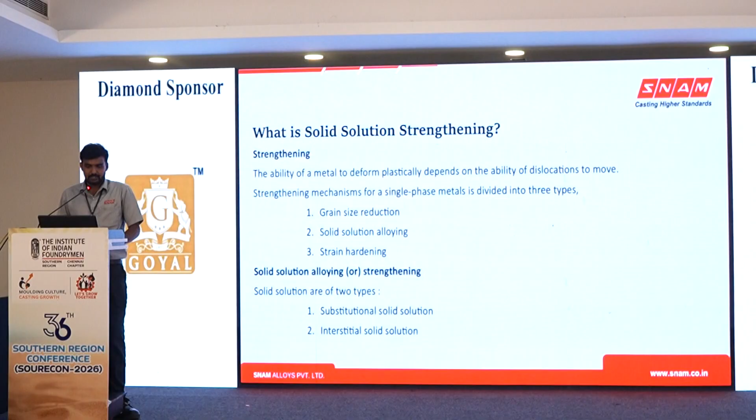So what is solid solution strengthening? Before that, let us understand what defines the strength of a material. Basically, plastic deformation defines the strength of material, and plastic deformation depends on how dislocations move in a crystal lattice. If dislocations move easily in a crystal lattice, the material is softer. If dislocations are blocked or difficult to move, the material is stronger.

So simply, to strengthen the material, we need to block the dislocations in the crystal lattice. For strengthening single phase metals, we have three different types of strengthening mechanisms: grain size reduction, solid solution alloying, and strain hardening. In grain size reduction, by reducing the size of grains, the grain boundaries will block the dislocations and help improve the strength of the material. In solid solution alloying, we add an alloying element to a base metal so that this alloying element creates distortion in the crystal lattice and blocks the dislocations.

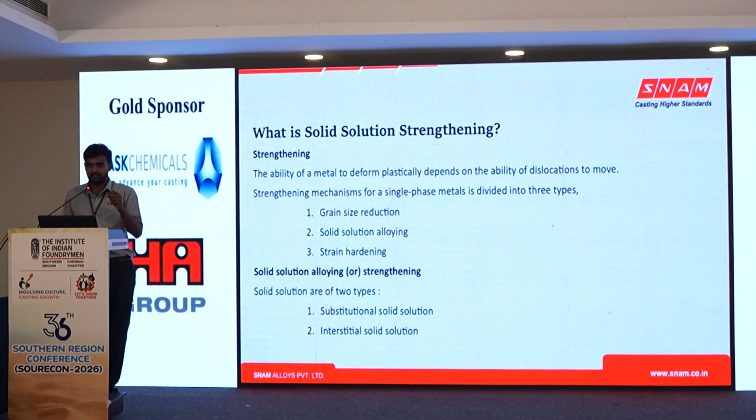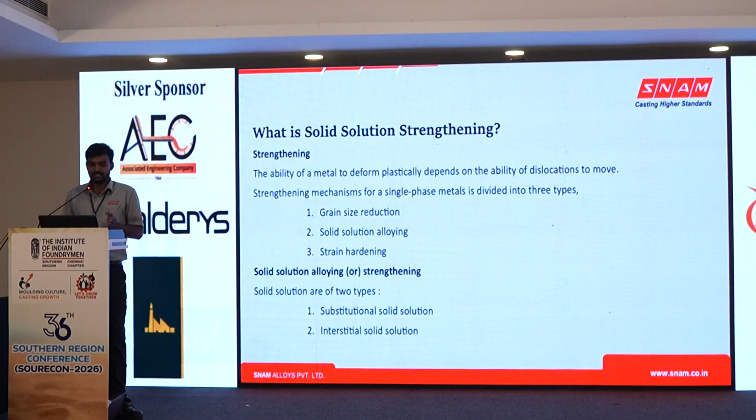This will finally improve the strength of the material. In strain hardening, we physically deform the material so that dislocations interact and block each other, improving the strength of the material. In both cases of grain size reduction and strain hardening, we need an extra step after casting. But in case of solid solution strengthening, while producing the casting itself, we can strengthen the material.

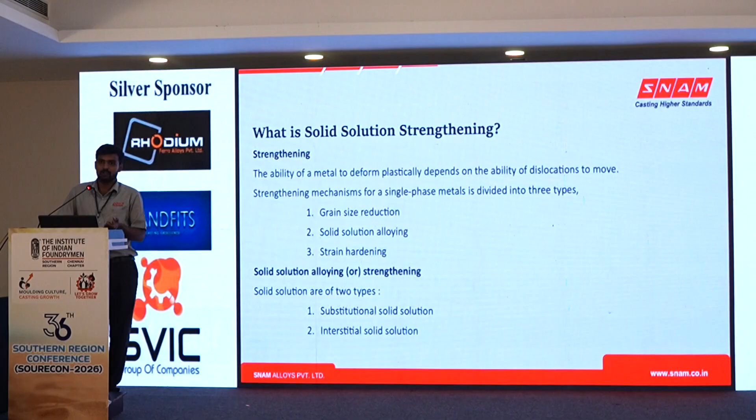So, solid solution alloying: we generally add atoms of the alloying element to a base metal, and this dissolves in the crystal lattice to form a solid solution. Solid solution is classified into two types: one is substitutional solid solution, the other is interstitial solid solution. In substitutional solid solution, the solute atoms replace solvent atoms and create a distortion in the crystal lattice.

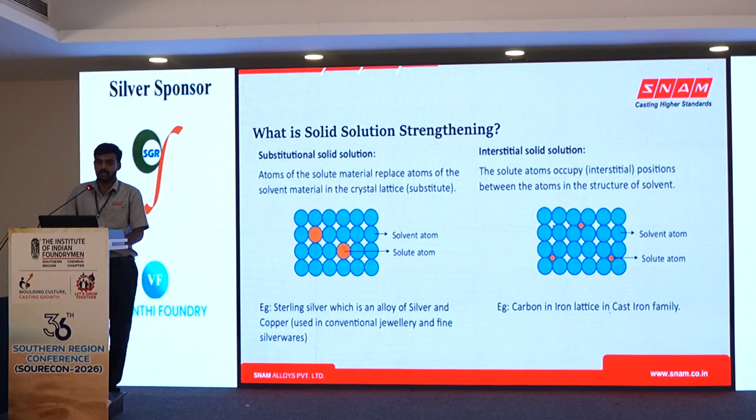For example, sterling silver. Silver is a soft material, but when we alloy it with copper metal, this will increase the strength of the silver, and it can be used in applications like conventional jewelry and silverwares. In the PPT on the left side, we can consider that blue color atoms are silver atoms and orange color atoms are copper atoms.

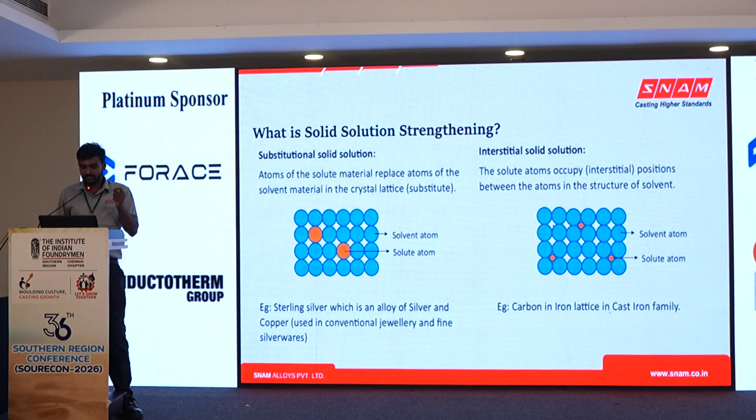So these copper atoms will replace the silver atoms and make the material stronger. But in case of interstitial solid solutions, the solute atoms will occupy the interstitial sites, the gaps between the solvent atoms. For example, carbon occupies the interstitial sites of iron, such as in steel and cast iron, increasing the mechanical properties.

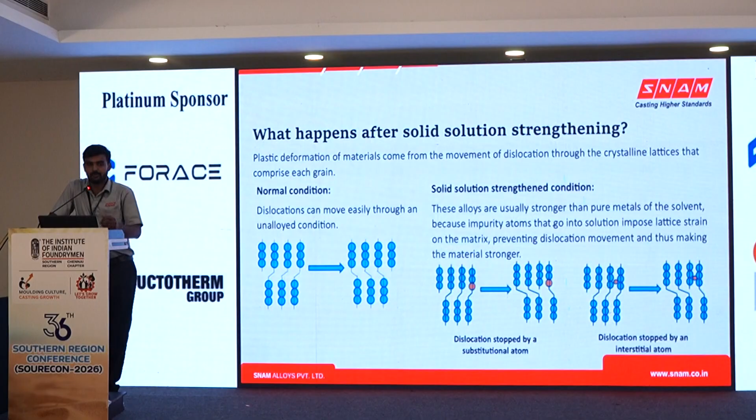So generally, what happens after solid solution strengthening? In a simple way, the material becomes stronger by blocking dislocation movements. For example, you know like a caterpillar, which is the starting stage of a butterfly. It slides one step at a time. If you leave the caterpillar in a smooth place, it will slide and reach its destination fast. But when we place some obstacle like a stone, it becomes difficult for the caterpillar to reach the destination.

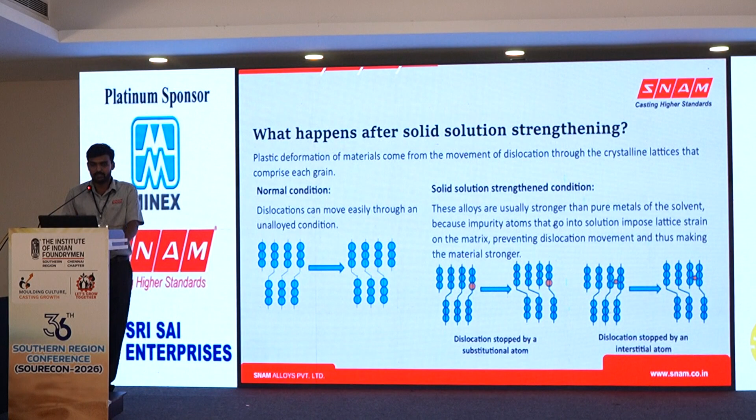So how to produce solid solution strengthened ferritic grade ductile iron? Generally, to strengthen ductile iron, we use strengthening elements like silicon, phosphorus, manganese, copper, etc. But in case of producing a ferritic grade ductile iron, we use silicon in the range of 3.2 to 4.3, depending upon the grade. Why silicon? Because silicon promotes the ferrite phase in the material, helping to increase the mechanical properties by increasing the silicon percentage.

As the silicon percentage increases, the mechanical properties will increase, and also at a constant silicon level, we can achieve a fully ferritic matrix throughout the casting section thickness, independent of casting size or geometry. But other elements like phosphorus and manganese cannot be used because they can have a harmful effect in ferritic grade ductile iron.

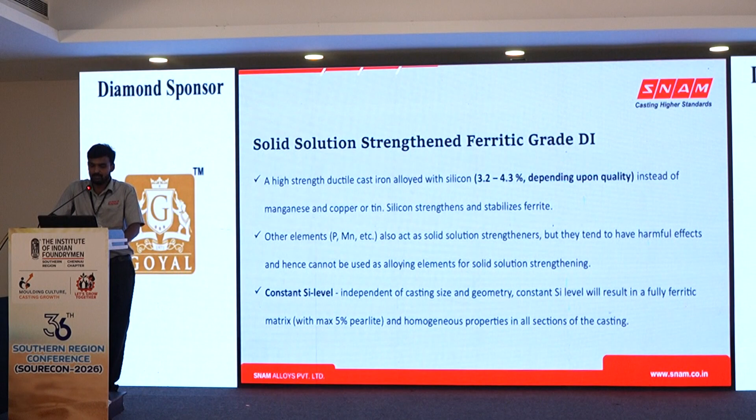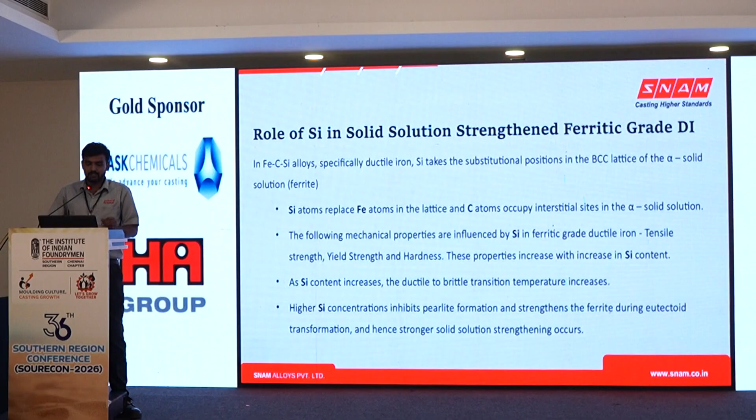So, the role of silicon in solid solution strengthened ferritic ductile iron: in Fe-C-Si alloys, silicon acts as a substitutional solid solution. Silicon atoms replace the iron atoms in the BCC lattice, and carbon atoms occupy the interstitial sites in a ferritic solid solution. As I mentioned, mechanical properties are majorly influenced by silicon — with increasing silicon percentage, the overall mechanical properties will increase.

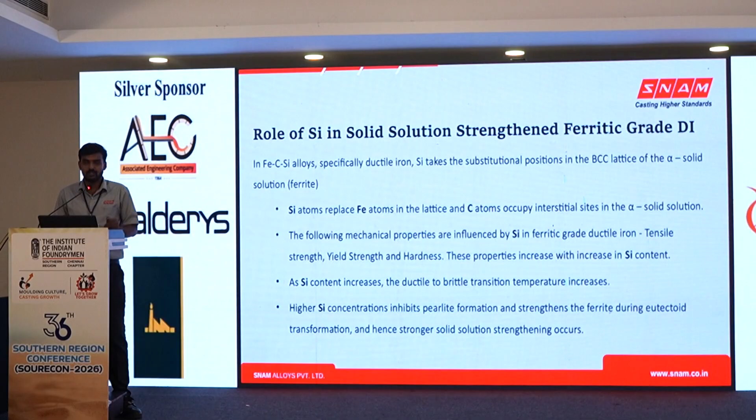As the silicon content increases, the ductile to brittle transition temperature also increases. The higher the silicon percentage, the more it suppresses pearlite formation and promotes ferrite formation in an eutectoid transformation, hence making the material stronger.

Now, various grades of solid solution strengthened ductile iron. As per EN standard EN 1563, EN 1564 issued in 2012, we have three different grades of SSFDI, which are 450/18, 500/14 and 600/10.

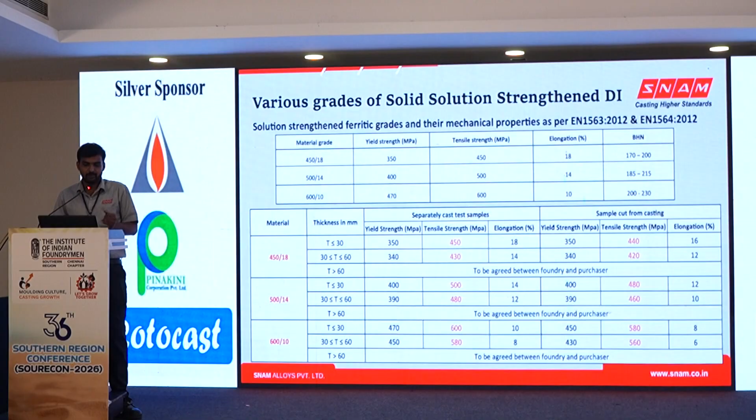When we compare SSFDI with conventional grades of the same class, we have an increase in yield strength and elongation, and also the Brinell hardness number can be achieved with minimal variation in Brinell hardness number.

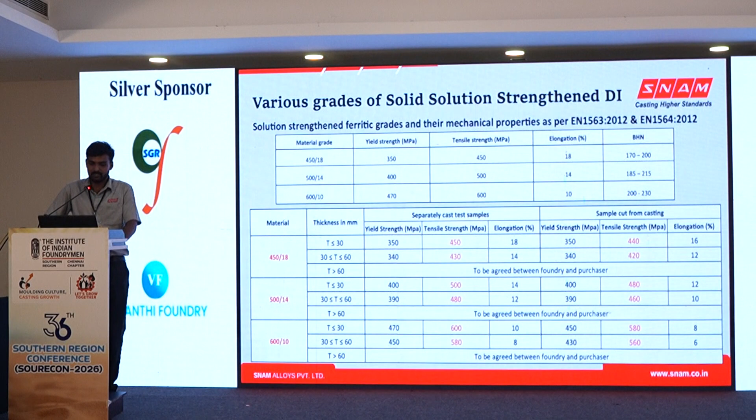Similarly, like conventional cast irons, for SSFDI also we have some acceptance limits based on the casting section thickness. For section thicknesses up to 30 mm, we have certain limits to achieve mechanical properties, and for casting section thicknesses from 30 mm to 60 mm, we have some acceptance limits. Above 60 mm, it should be agreed between the foundry and purchaser.

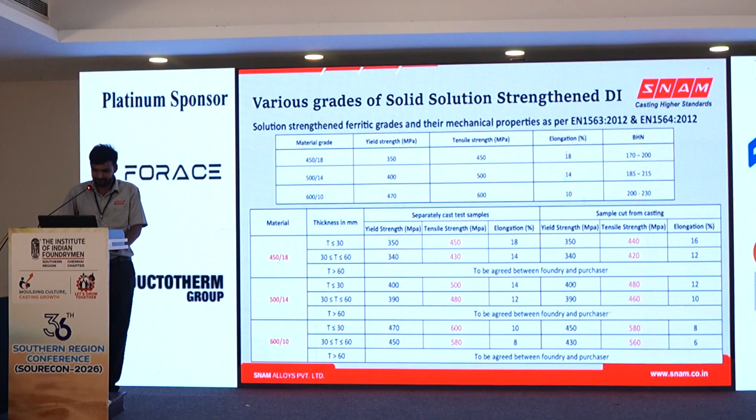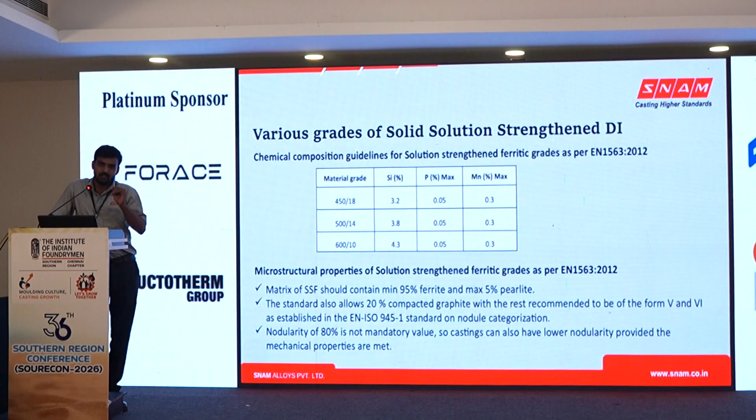SSF DI as per EN standard 1563, we need to maintain minimum 95% ferrite phase and maximum 5% pearlite. Also 20% compacted graphite is allowed, but the rest should be recommended to form type 5 or 6 grade nodule category as per EN-ISO 945-1.

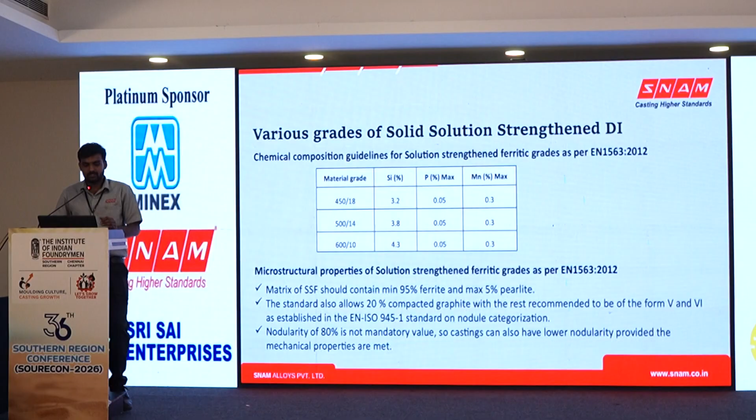Nodularity is also not mandatory at 80%, but we should achieve the mechanical properties. If we achieve the mechanical properties, nodularity is not mandatory at 80%.

When we compare the same grades of conventional grades and SSF DI grades, there will be an increase in yield strength and elongation. In this chart we can see comparison of yield strength for grades 450, 500 and 600. The white color identifies conventional grades and blue identifies SSF DI. We can see around 13 to 27% increase in yield strength compared to conventional grades in SSF DI.

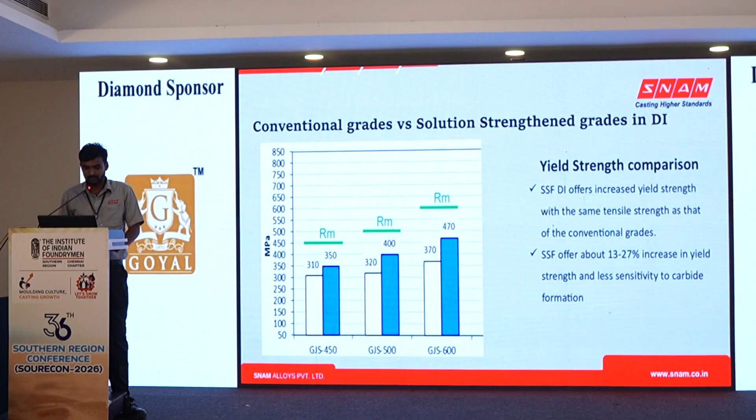When we see the elongation, it's almost three times higher compared to conventional grades. For example, if you take grade 600, the elongation for common conventional ductile iron is only 3%, but in case of SSF DI, we have 10% elongation.

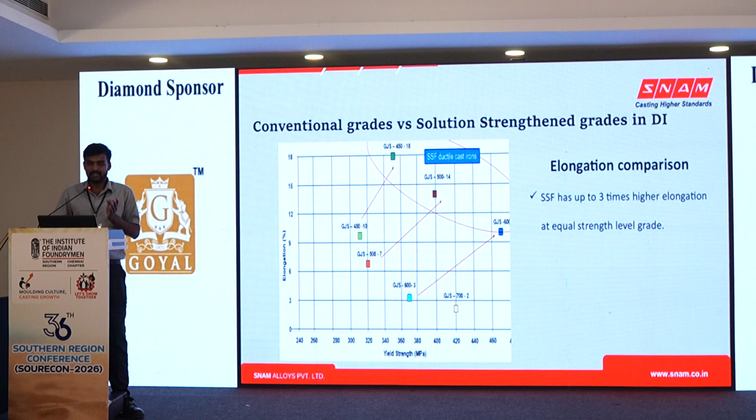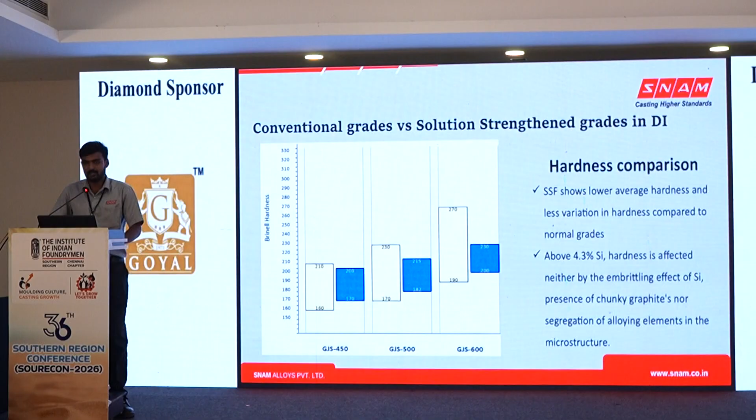When we see the hardness comparison, we are able to achieve lower average hardness with minimal variation in SSF DI compared to conventional grades. In conventional grades, we have larger variation in Brinell hardness number.

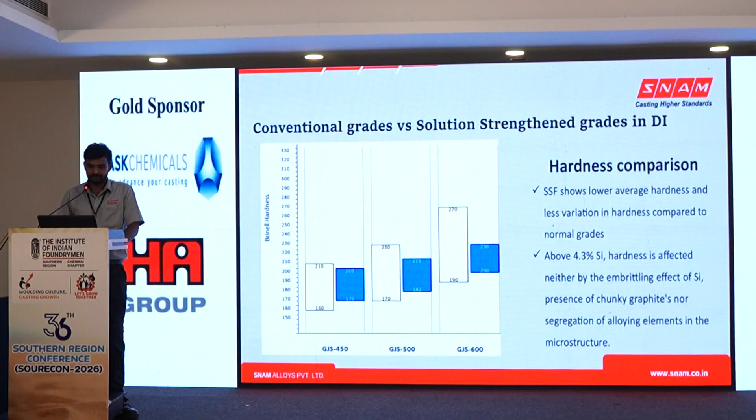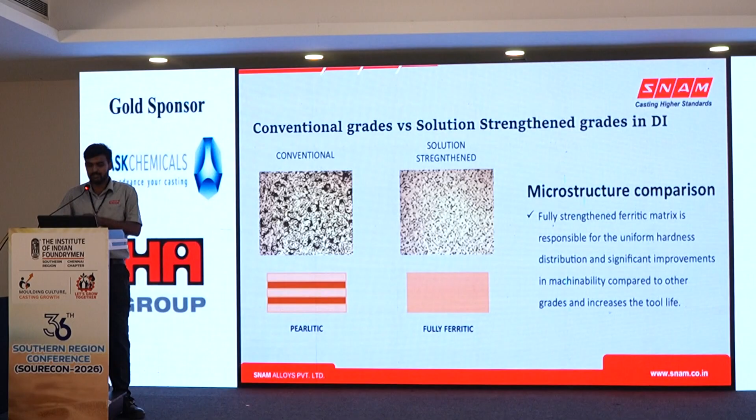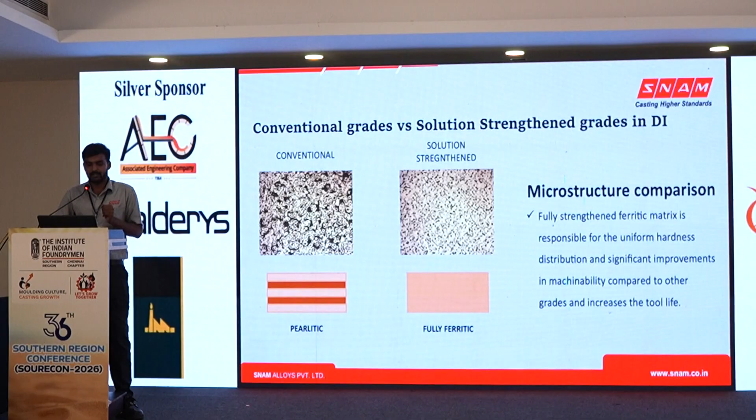When we see the microstructure of conventional grade ductile iron and SSF DI, in SSF DI we can see a fully ferritic matrix which helps us achieve homogeneous mechanical properties throughout the casting section, and also helps in easy machinability, improving tool life. But in conventional ductile iron, we have pearlitic and ferritic matrix, which makes the material somewhat brittle, and machinability is more difficult compared to SSF DI.

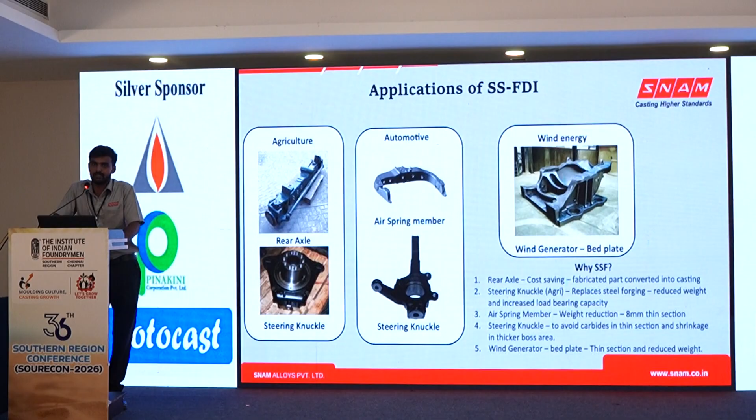But why SSF? SSF can replace forged parts with castings, and by reducing weight we can increase mechanical properties. We can also achieve homogeneous properties independent of casting thickness, whether thinner or thicker section, throughout the casting, and it's also rupture free.

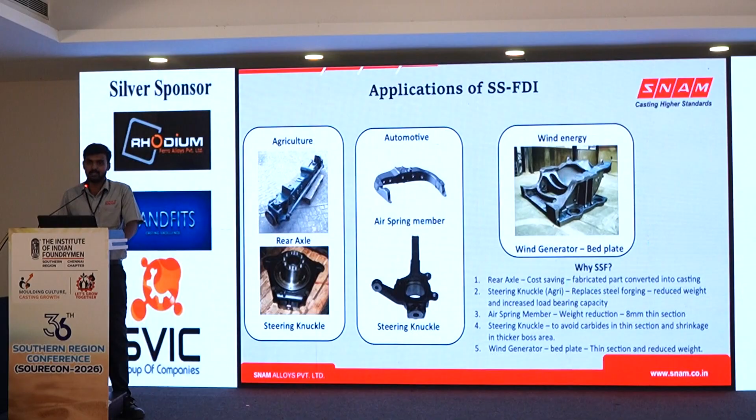Because of the ferrite matrix, advantages of SSF DI include increased mechanical properties, with 13 to 23% increase in yield strength and almost 3 times higher elongation. It has uniform matrix distribution throughout the casting, and is not sensitive to nodularity and carbide formation.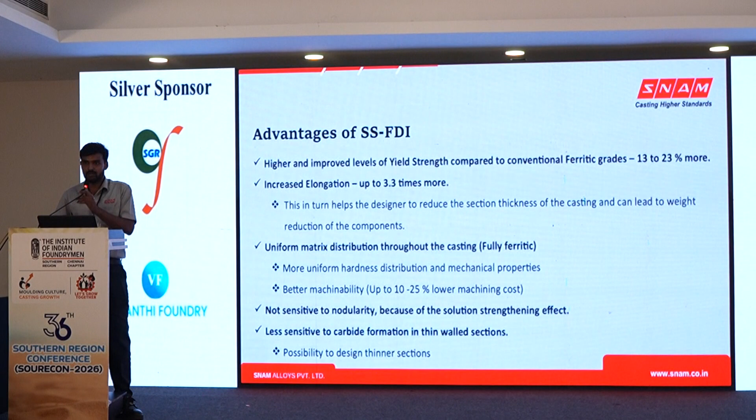Based on this data and literature survey, we conducted experiments in our R&D to produce solid solution strengthened ferritic grade ductile iron. The grades produced are 600/10, 500/14, 450/18 by varying addition rates of FSM and inoculant.

The following are the process details. We followed chemical composition as per the standards, and tapping temperature was maintained around 1520 to 1540. The treatment method is the Tundish cover sandwich treatment method. For FSM, we used a common grade of 6 to 7% magnesium at an addition rate of 1.1 to 1.2.

For inoculation, we used barium based inoculant at 0.45 to 0.55 in two different stages, one in the treatment ladle and another in the transfer ladle. We also added nickel based on requirement, from 0 to 0.2 to 0.25%.

The following sample castings were poured during trials for mechanical analysis. We poured an AFS standard coupon to check hardness and microstructure of casting, and also a 1 inch Y block to check tensile properties: tensile strength, yield strength, and elongation.

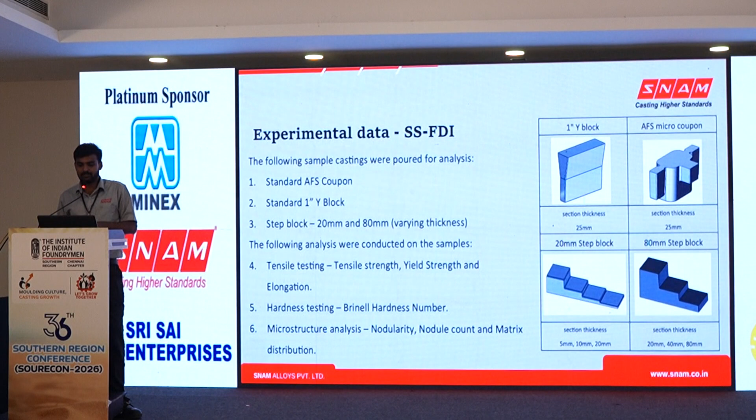We also poured step blocks, two different types: a 20 mm step block and an 80 mm step block, consisting of 5 mm, 10 mm, 20 mm, 40 mm and 80 mm thicknesses, to check nodularity, nodule count, and microstructure properties throughout the casting at different section thicknesses.

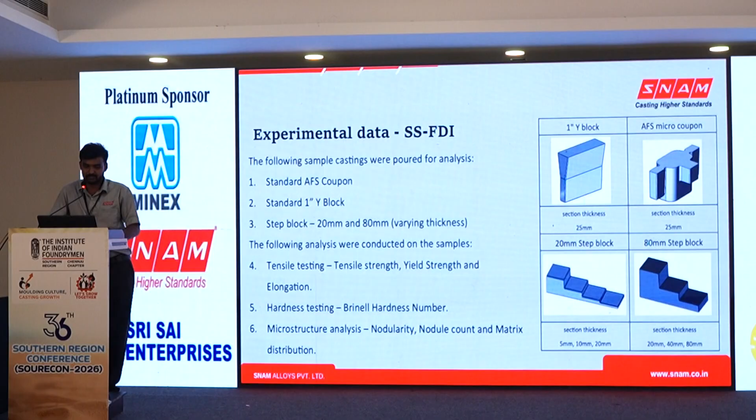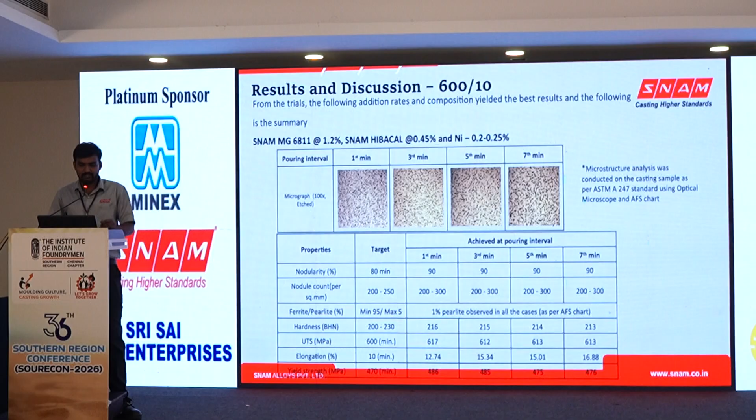As per the discussed parameters, we conducted trials by varying different compositions, and from the trials the following addition rates and composition yielded the best results. We used magnesium 6811 at 1.2%, inoculant Hibacal at 0.45%, and nickel at 0.2 to 0.25%.

The following table shows the metallurgical and mechanical properties of the 600/10 grade at different pouring time intervals. We can see we achieved nodularity of almost 90% and nodule count as per the standard, and we also achieved all mechanical properties as per the standard.

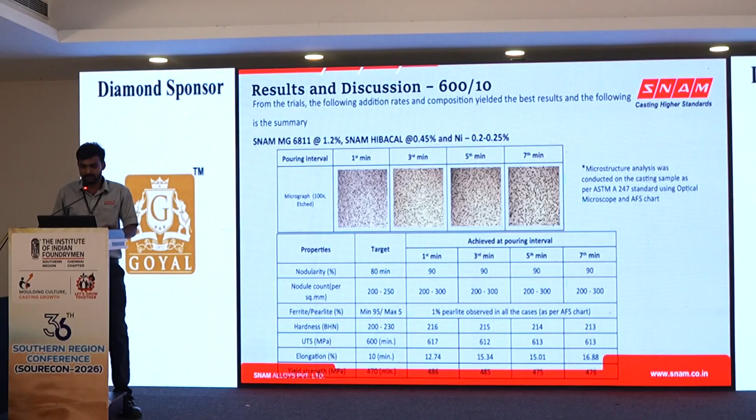So the effect of nickel on mechanical properties. When we try to produce 600/10 without nickel, we are unable to achieve mechanical properties such as tensile strength and yield strength.

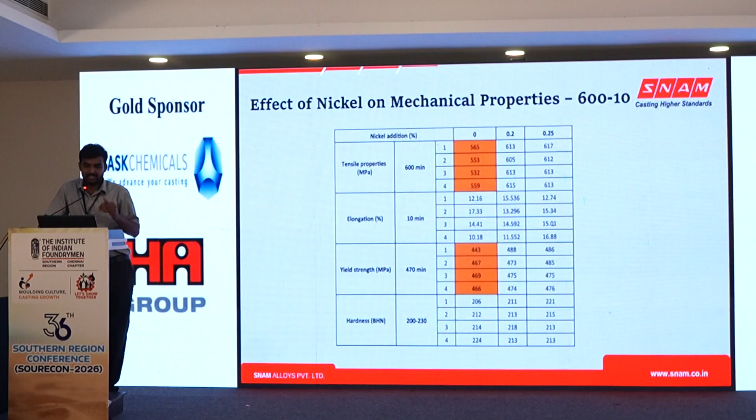This is because in this grade the silicon percentage is 4.3. If you go above 4.3% silicon, it may have a tendency to form chunky graphite or segregation of alloying elements in the microstructure. So we can't increase the silicon to improve mechanical properties like yield strength and tensile strength. So we have added nickel to increase the tensile strength without affecting the ferrite phase.

We have added 0.2% nickel and we have achieved almost all mechanical properties as per the standards for the 600/10 grade.

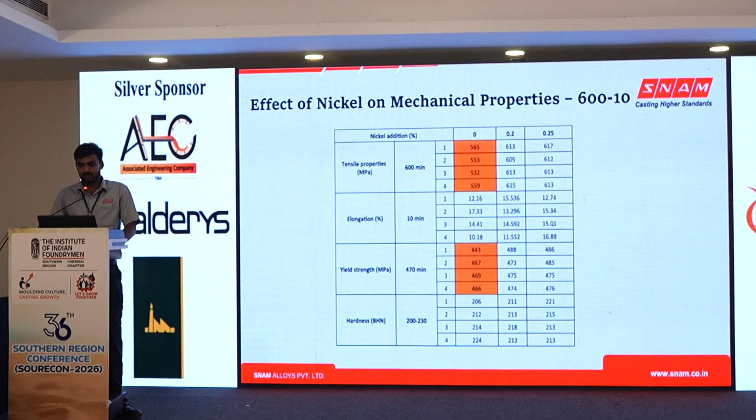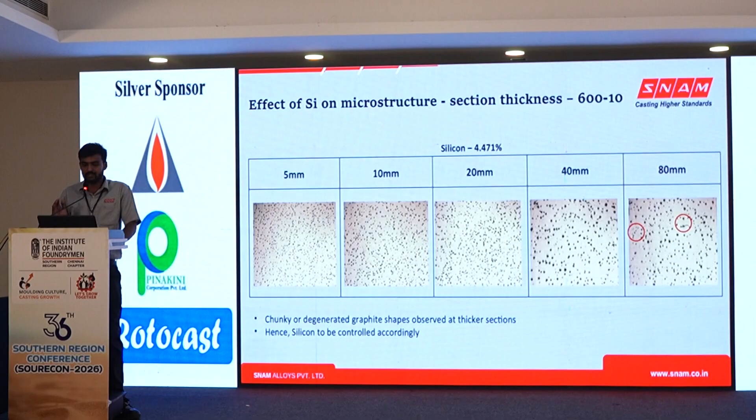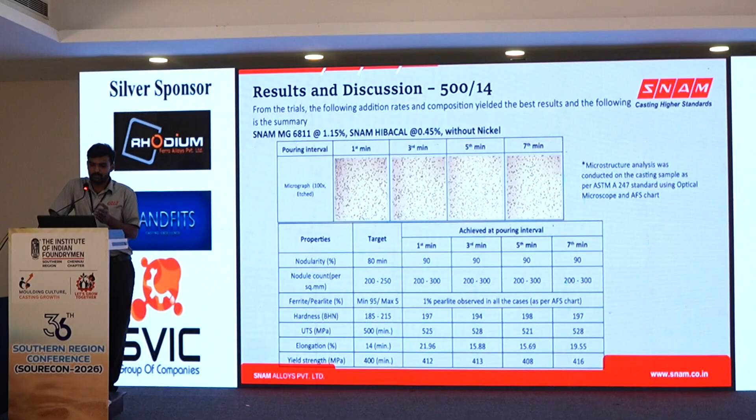Similarly, we have tried to produce 500/14. From the trials, this combination gives the best result: MG 6811 at 1.15% and HIBACAL at 0.45%. But when we tried to produce 500/14 without nickel, we have achieved all mechanical properties.

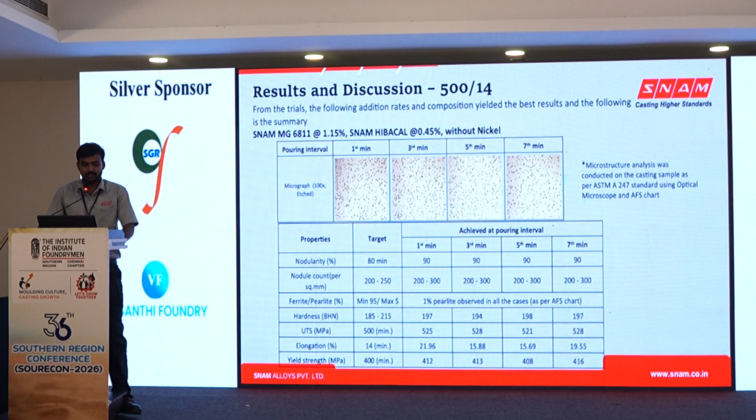The table shows mechanical properties and metallurgical properties at different pouring time intervals. We have achieved nodularity of minimum 90%, and pearlite percentage is only 1% as per the AFS chart. We have also achieved minimum tensile strength of 500 megapascals, and hardness is also within range.

When we try to produce 450/18, this is the best combination: 1.1% magnesium and inoculant of 0.55%. We have achieved the mechanical and metallurgical properties as per the 450/18 grade. These are the mechanical and metallurgical properties at different pouring time intervals.